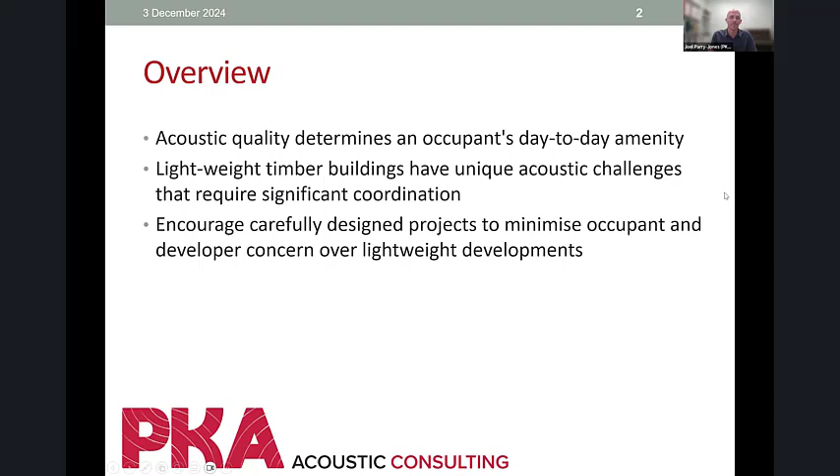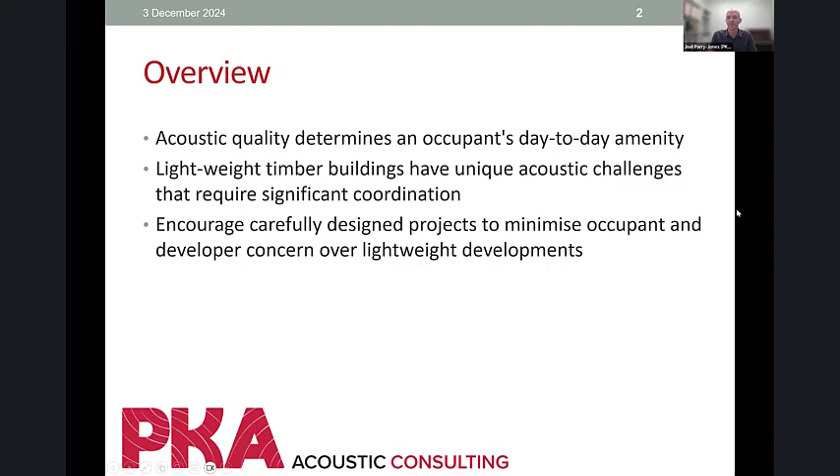And so I really am encouraging carefully designed projects, one that helps minimize occupants' noise complaints over the long term, and it also helps developers in terms of their concern over lightweight developments and whether people will be cautious in purchasing. So well-designed buildings is what I'm preferring.

Now, without a problem, there's no solution, and so there's a fairly easy problem in the Australian code, and it's just that some of the code is just not up to scratch in terms of what people are expecting from amenity.

So straight from the NCC, the building code, their goal is to have a nationally consistent, but it's minimum necessary standards for all health, safety, amenity.

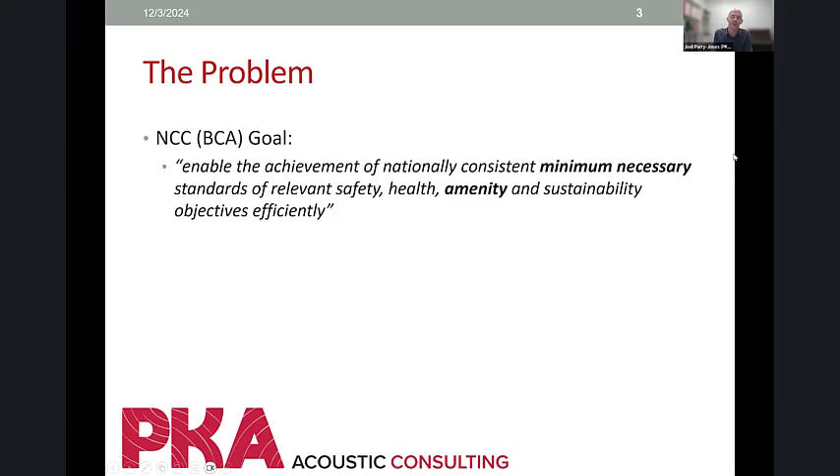And so this minimum standard, when we push back on the building codes board and say we think the criteria isn't good enough, they say, well, it's only minimum. It's only to meet the bare minimum, especially for low cost housing. And so that's a real problem when you're trying to design a lightweight building, but even just a quality apartment.

Now, the actual objective in the building code is actually quite stringent, because it's trying to prevent the illness and loss of amenity to the occupants. So it's designing buildings, floors, walls, all the treatments around to not lose amenity.

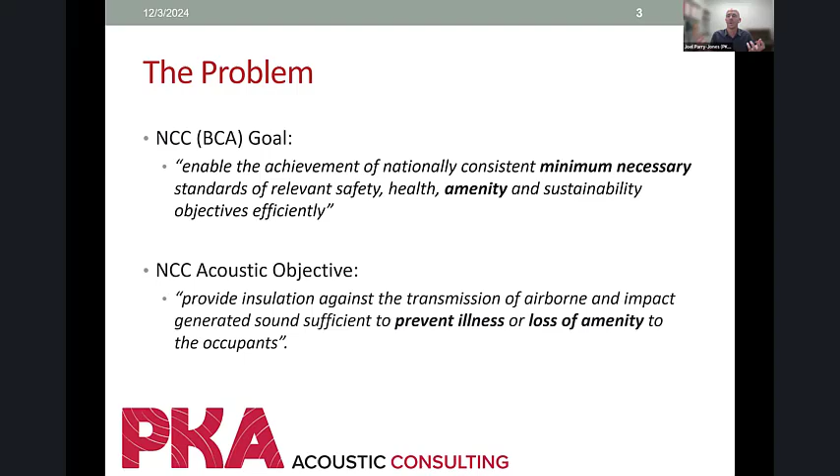And so the question is, well, what is the standard? So the basic standard that you're probably familiar with, which is now Part F7, previously Part F5, is you have an airborne component in terms of how much sound travels through the air. And that's these RW descriptors and CTR descriptors, which we can get into, but they're single numbers that are trying to capsulate how much sound is transferring between spaces.

And for airborne, it's an RW plus CTR greater than 50. And for impact, it's an LNW, and Aedan can get into some of that too, but the lower number is better for impact. And so those are the standard Part F7 requirements.

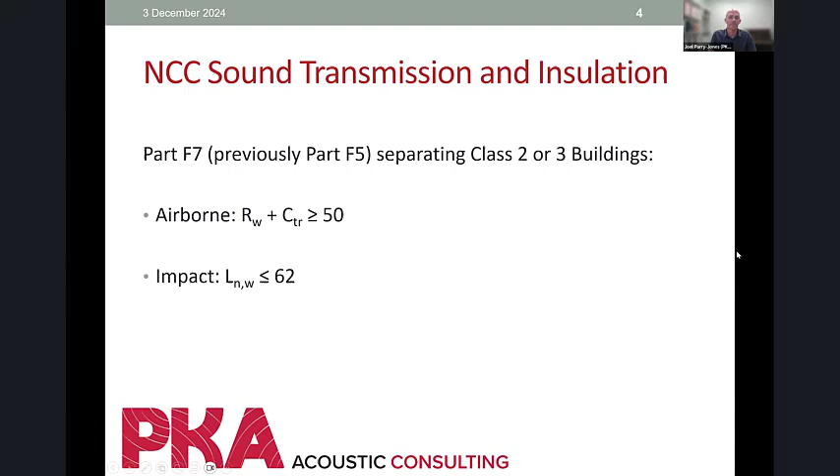Now, just generally, we won't get into too much specifics here in the intro, but in my opinion, a lot of the acoustic consultants around industry think the airborne criteria is very reasonable. It's sufficient. If you build to the airborne criteria, conversations, television, music, all that sort of noise within an apartment is fairly controlled. We rarely have noise complaints from that. If the building's been built to code, it's fairly suitable.

There's no other way to say it, but the impact criteria is woeful. So please don't design for minimum. Now, normally conventional buildings with concrete can get away with it because their standard designs are already sometimes better than minimum. So especially if you're doing a lightweight development, don't aim for the minimum.

Footsteps, moving furniture, any sort of hydraulic services, any sort of structure-borne noise readily causes complaints. We're constantly dealing with insurance claims, and when we assess them, we say, sorry, it's meeting code unless there's a specific development requirement that was anticipated or baked into the contract. There's really nothing that can be done.

So we're really offering and recommending you aim a lot higher or a lot better.

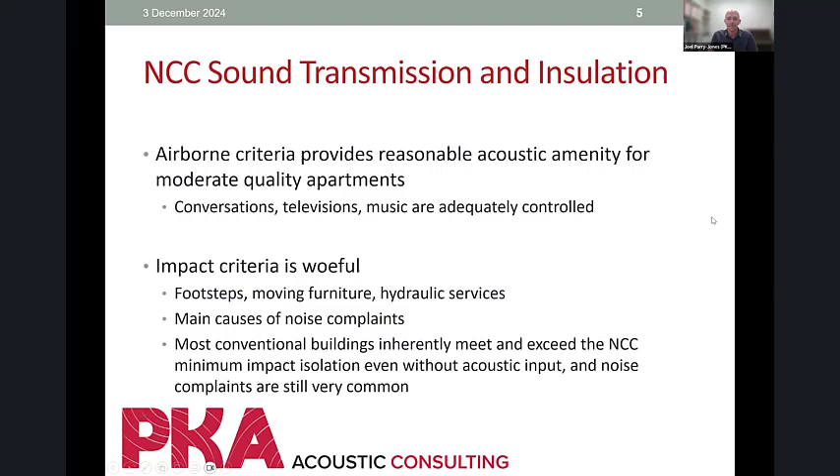There is an AAAC guideline on apartments that my firm and other firms have helped develop, and it rates them in star ratings, and we'll get into that in more detail. But it rates the impact criteria down at about a 2-star, and you could go all the way up to about a 6-star in terms of performance.

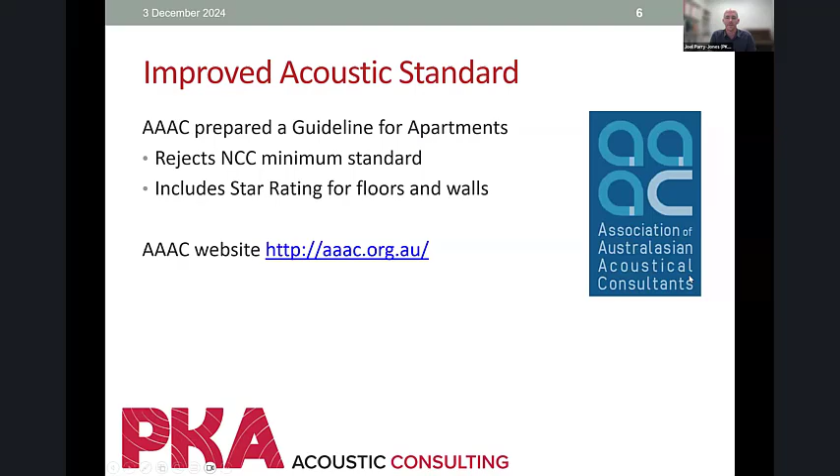So that's probably all from me from the intro. I reckon Aedan could probably step in here and talk a little bit about the North American market. Is that right, yeah, Aedan? Yeah, that sounds good. Thanks, Joel.

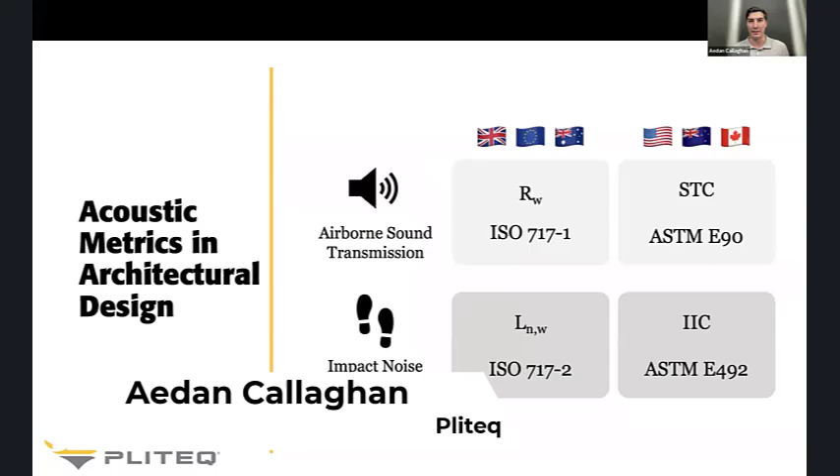So, like Joel was mentioning, there's some similarities and a few differences between Australian acoustic requirements and North America. One difference is that in North America, the up to 6-story building height is really dominated by lightweight timber construction. So I thought I'd start by comparing the similarities and differences, then pass it back to Joel, and we'll get into what's being done and what performance is achievable with some of these buildups.

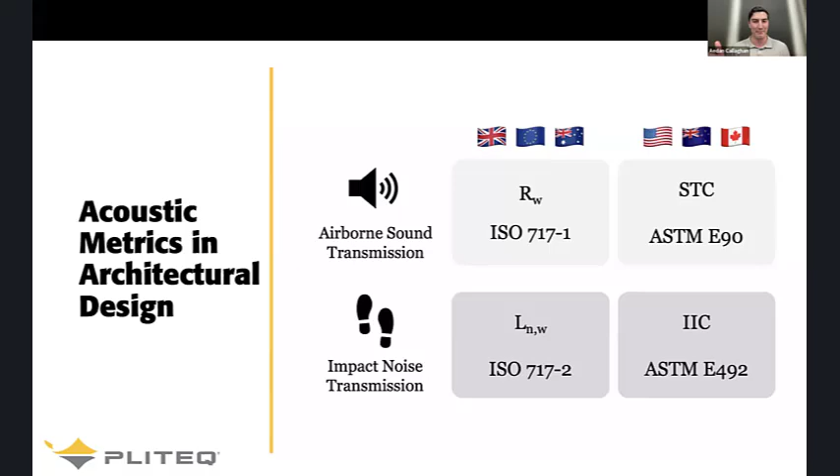So starting off, the UK, the EU, and Australia are all under the ISO standard for acoustics. The US, Canada, and New Zealand are all under the ASTM standard. So for airborne sound, RW and STC are the two crossover metrics. And for impact noise, LNW and IIC are those crossovers. Now, one of the similarities is that the vast majority of noise complaints in both jurisdictions fall under impact noise transmission. That really is the piece that lacks in building codes in many countries, not specific to one area.

So there are a few more nuanced differences. The frequency range that is examined varies slightly from the ISO standard to the ASTM standard. But one of the bigger ones is that the ASTM standard has something called the 8 dB rule, which basically limits that single number rating. I'll touch on an example that puts more context to that and how these single numbers are determined, and then Joel and I can probably both speak to some of the challenges in a single number rating.

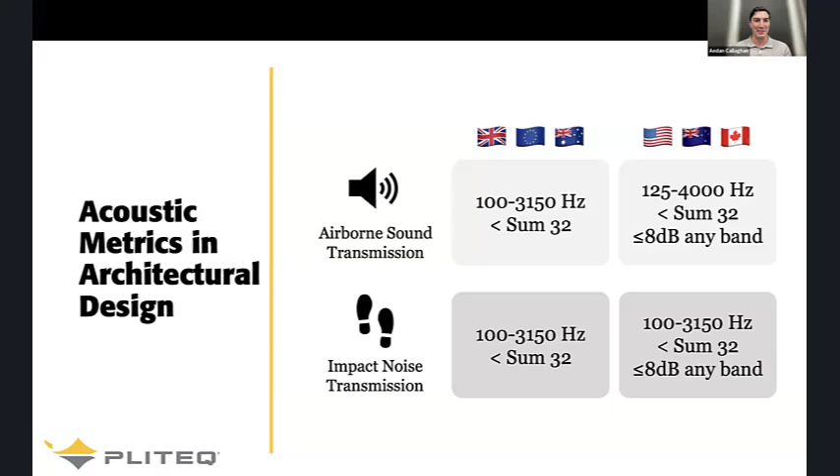So starting with the ISO standard: for RW, the higher the number, the better. LNW is actually the opposite, the lower the number, the better. ASTM has decided to make it so higher is always better. So basically, without getting into the nuance of that 8 dB rule, to get your IIC rating, you just take 110 minus your LNW.

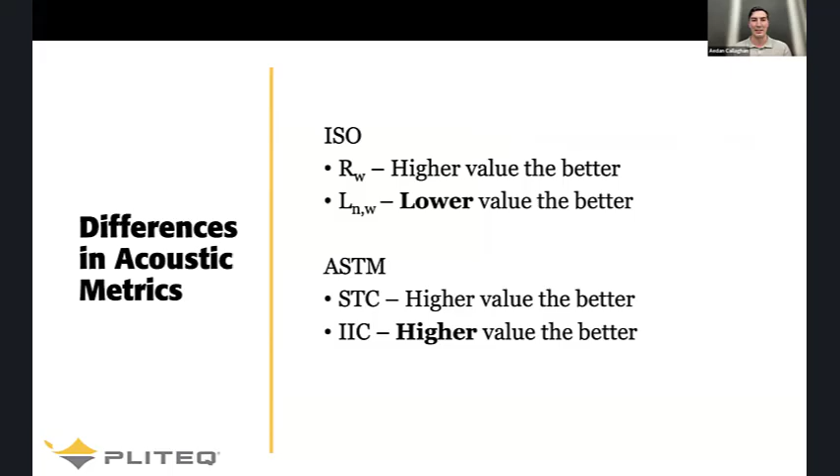But then there's this challenge of a single number rating not really telling the whole story. So in North America, they decided, since one single number rating is challenging, let's have 3 single number ratings instead. These 2 additional ones aren't code required, but they are starting to be looked at in the acoustics community, and I think there's some benefit—it's better than just having one single number where you might be missing information.

So it's been broken down into these additional HIIC, or high frequency impact insulation ratings. The reason is that if you change your underlayment on a concrete building, you can occasionally double the thickness of the underlayment and not change your single number rating, even though high heel clicks have gotten drastically quieter. The high frequency is what that underlayment is helping with, but you might not see it because it's getting drowned out in the single number rating.

Conversely, for wood frame, you might be meeting code, or even meeting a reasonable, well above code single number rating for impact performance, but the low frequencies—50, 63, and 80 hertz—aren't covered in either of those standards, whether it's LNW or IIC in North America. So this new rating looks at those low frequency data points and more heavily weights them.

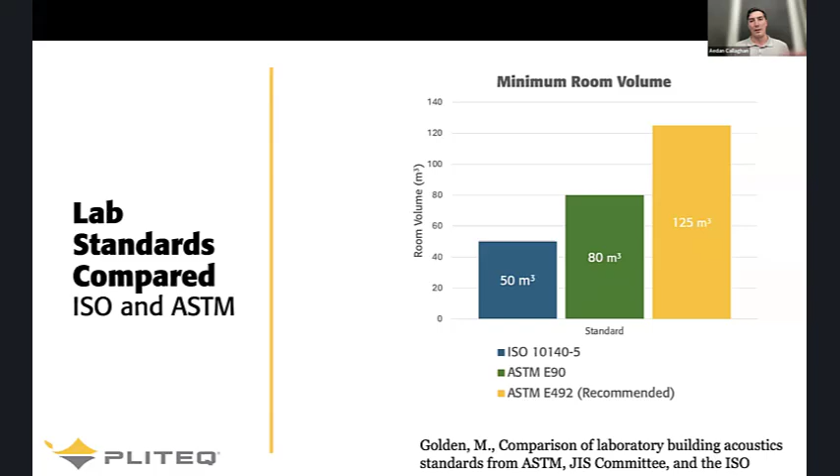What that means is that the point that you're getting to sort of a representative measurement, where you have enough sound waves bouncing back and forth in the room to get a real representative measurement, tends to be around 400 hertz for the ISO minimum room volume, and 160 for the ASTM minimum room volume. So it just means that below that, you can get larger variations in that result. So that is one of the challenges that the industry faces as we try to develop better low frequency performing systems.

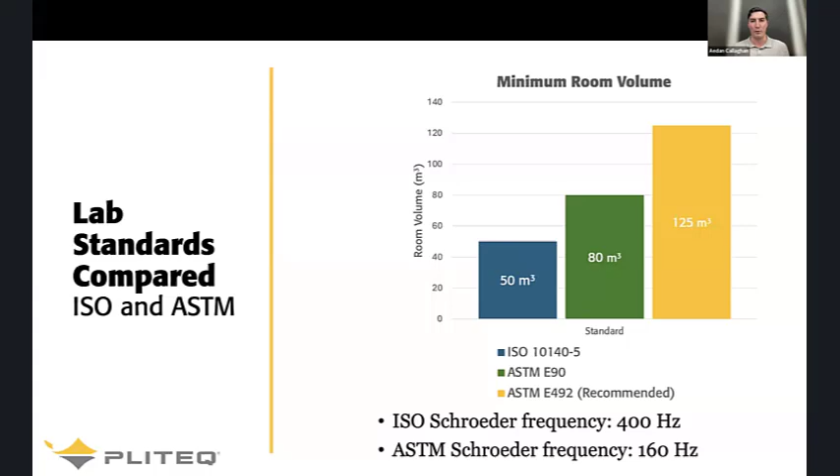Now to that 8 dB rule, this is actually one of the things that helps in North America prevent these really woeful low frequency performing assemblies. And the reason for this is that to get your single number rating, you actually, in both standards, sum up any deficiencies. So any point where your impact sound is above this reference contour is called a deficiency. Both standards have the sum of that having to be less than 32.

But in ASTM, there's this extra rule that at no single frequency can it be more than 8 decibels above that contour. So this black curve here is where it's limited that single number rating because we have 8 deficiencies. So it's saying it's really poor performing down at 100 hertz. In the ISO standard, you don't have that rule. So you'd actually be getting IIC 46 in the North American test methodology, which is about an LnW 64.

So you would not be meeting code there, let alone having any kind of good, I guess, comfortable assembly. But the single number rating would actually put it at a 54 because it's sort of under penalizing how poor that low frequency performance is. So I can pass it back over to Joel to get into a little bit on some systems, and then I'll go through a couple North American case studies.

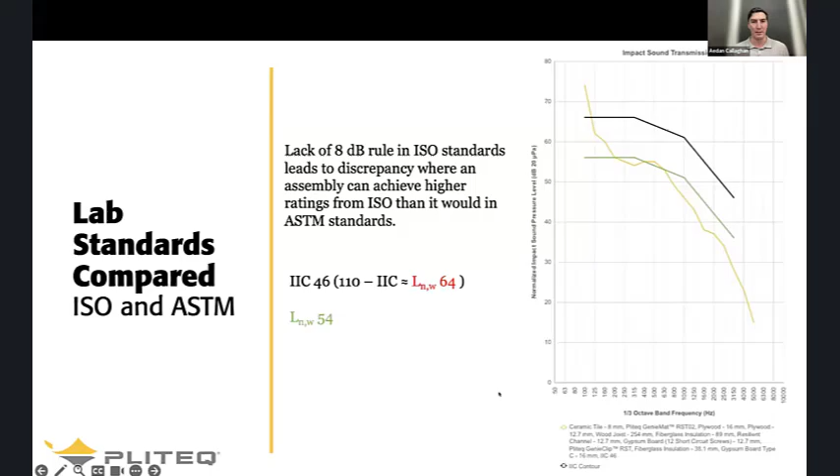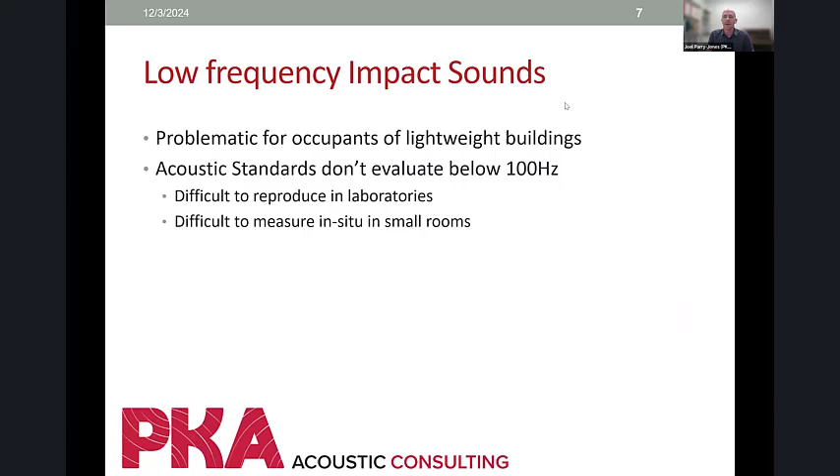Yeah, that's a great example, just showing 10 dB difference just by how it's actually rated. So I'm going to talk a little bit more about the single ratings, and Aedan's already sort of touched on that in terms of how problematic it is to actually measure it. So here's just a standard example where I thought, let's take a conventional system and then a lightweight system. Let's just have a look at how they perform across the frequency spectrum.

So you've got standard concrete slab. I'm not even putting anything on the surface, just bare concrete slab. And then with just a standard suspended ceiling, no resilience, no acoustic insulation. So that's sort of the minimum that we always see builders trying to push over the line with us. And then this is basically the deemed-to-satisfy code required timber joist system that's in the building code. So how do they compare?

So this graph, just as a little primer, similar to what Aedan's talking about, if you can see my mouse here, you've got your low frequencies down the bottom here. That's all your thuds from bare feet, from children running, things like that. Then you've got your mid-frequency footsteps, and then your high frequencies from high heels and hard shoes and things like that. So the blue line here is the overall concrete performance, and a lower number is better.

So it's showing that in the low frequencies here, it's sitting around 60 to 70 dB, and then it's sort of following this dotted line curve, which is sort of like the averaged level to replicate an LnW 62. And then you can see here that because it doesn't have any underlay in it and there's no resilience, the high frequencies are more prominent. So you'd hear high heels more. But when you compare it to your lightweight floor, it is getting the exact same LnW 62.

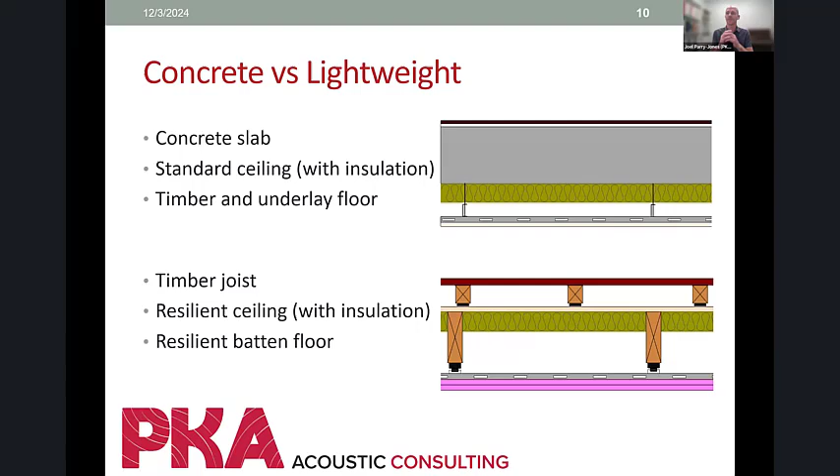So then the next system for comparing, just to show the deficiencies of that single number, is a fairly well isolated concrete system. It's now got some acoustic insulation in the cavity, and it's got a timber floor with some rubber underlay. So it's a pretty conventional concrete that you'd see in a moderate to high-end apartment. And then in this case here, I've got the standard timber joist ceiling, and I've put a resilient batten on top, to see what could be done to improve that. And I've sort of jury rigged the numbers to get the same LnW value just for comparison.

But you can see here that they're both achieving 45, which is almost 20 dB better than what the building code would recommend as the minimum. And you can see here that in the high frequencies, all those hard sole shoes and high heels, they're basically equivalent. But there's enough isolation in the system now that you're barely hearing those, if at all. And then there's a bit of change through the mid-range where, because of the amount of resilience in the timber system, it's performing better in this case. But there's still a significant, almost 10 dB difference in the low end.

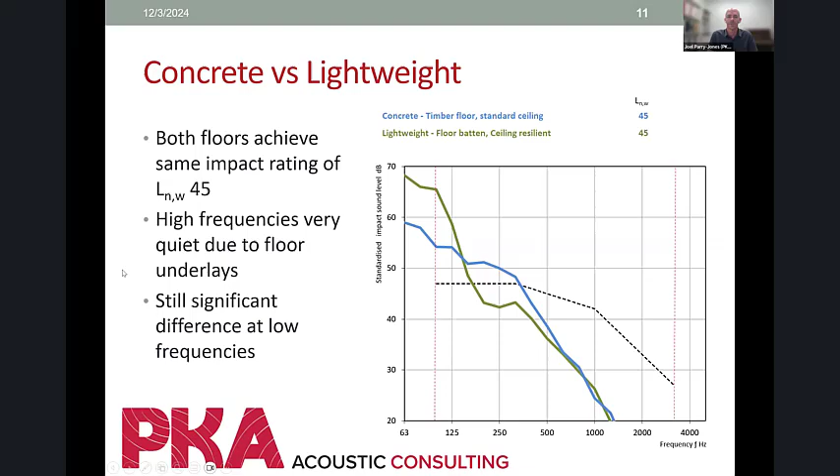So even though this is a good rating, if you were to get a 45 on site, you'd be very happy. There's still a big change in the perception of that sound, that it'd still be like, oh, it doesn't sound quiet, even though it's a good single number rating. So that's sort of just a word of caution. I might jump back to you, Aedan, before I get into some comparisons. Yeah, sure.

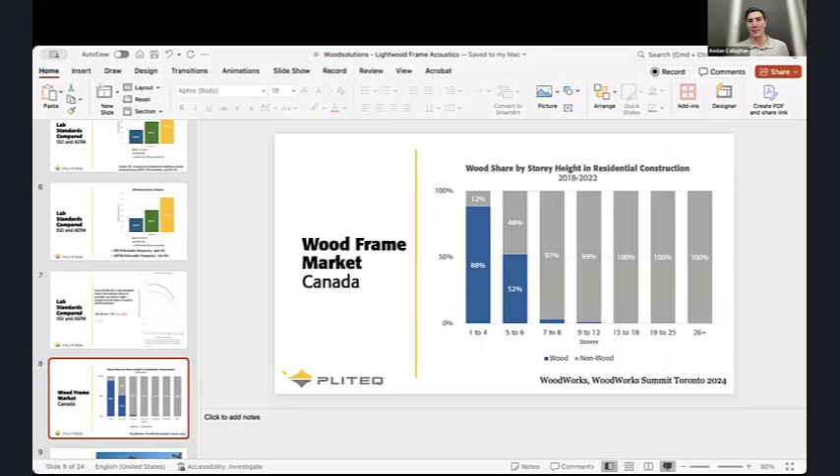So when we're talking about North America, I mentioned it's a pretty drastic amount that is being built in wood in that low to mid-rise here. And there's a couple of reasons for that, but the main drivers are it's a much more cost-effective way to build in a lot of cases at these heights, and the other reason is sustainability. So the government, both in Canada and the US, and I think it's the same in Australia, there's an affordability crisis and housing crisis. So we need more housing stock delivered, and trying to figure out ways to do that affordably and sustainably, because the carbon emissions of building the amount of housing needed if it was all out of concrete would be quite drastic, have led the charge there.

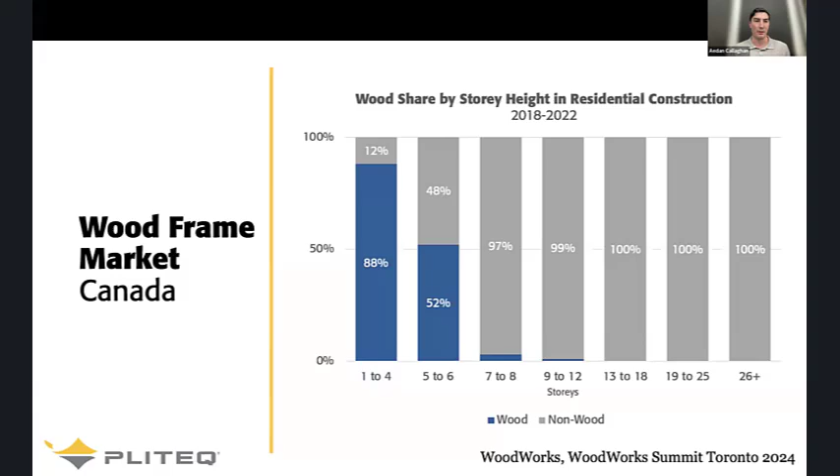But from 1 to 4 stories, this is specific to Canada from the Woodworks group over here, 88% of that construction is in wood. When you get to 5 to 6 stories, still 52%. So it's still the majority of projects at that height being built in wood. 7 to 8 and then 9 to 12 are where mass timber is starting to slowly take bits of that market share. Light wood frame in North America tends to be limited around that 5 to 6 story height per the building code for fire here.

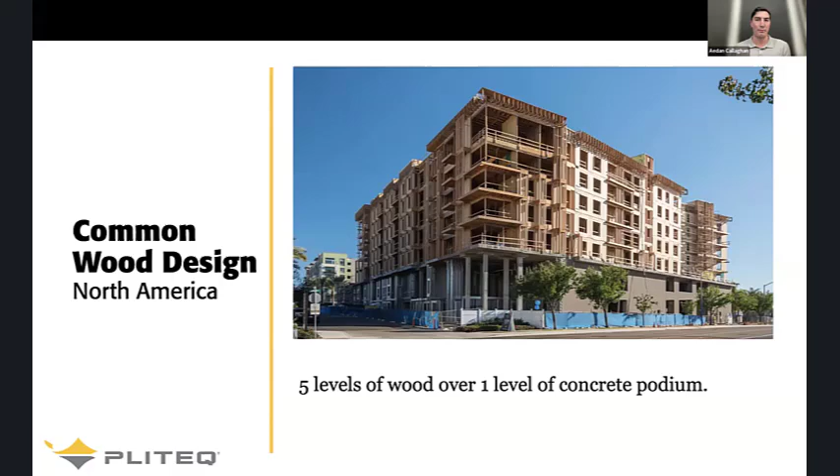So the most common project type in North America is what we call here a 5/1. And that is 5 stories of light wood frame built over one concrete podium level. And you can't typically drive for more than 10 or 15 minutes in a North American city without seeing, especially as you get to the suburb areas, this type of project. So I thought we would look a bit at what is being done on all of these projects and compare how the performance levels end up relative to concrete.

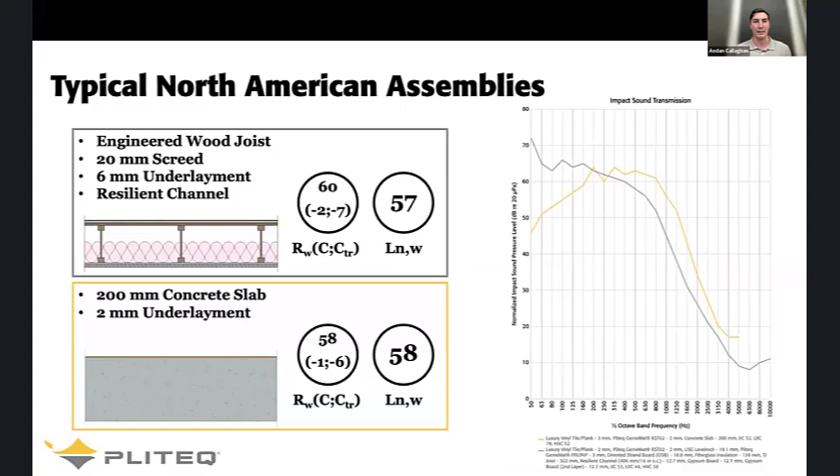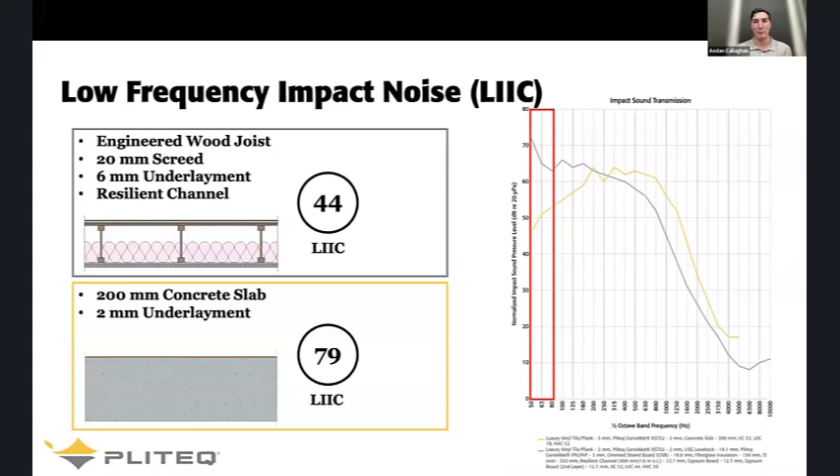And this is where those other single number ratings that North America have introduced come into play. So at least it gives you a sort of idea these two assemblies aren't the same. So that wood frame assembly, if you just looked at the low frequency impact noise, is 44 versus 79. So the concrete you can now see is very high performing relative to the light wood frame. The high frequency, the HIIC rating, would say that the wood joist assembly is a little better. It's 6 points better than the concrete, but that's not where the noise complaints are going to be coming from. So it gives a little more insight into that comparison.

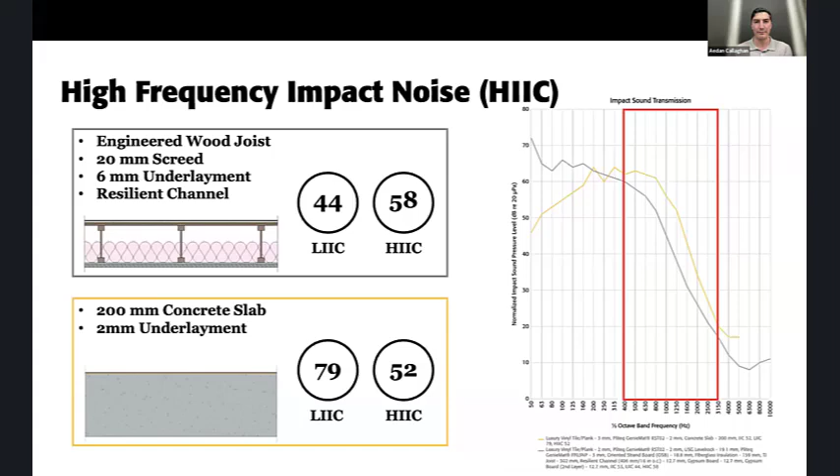The other thing that's been a big move in North America in the recent few years, and I think other places like Australia, the UK and parts of Europe have been much more advanced in this area, is not relying on screed. In North America, it's been very common to just pour screed toppings that often actually underperform relative to what the lab testing would say. But there's been a big shift away from that for a number of reasons: issues with cure time or cracking, reducing the structural weight, and then new initiatives and code requirements to actually reduce the embodied carbon of these structures and keeping this mined cementitious wet material out of these wood buildings have been kind of a big focus.

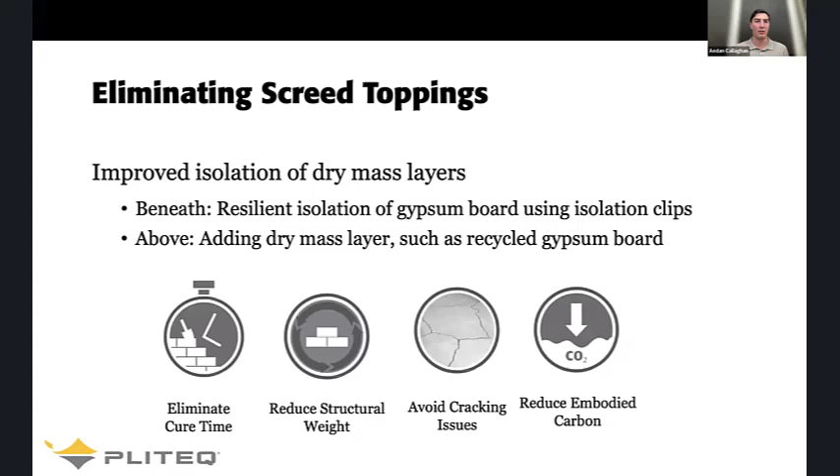Same goes for mass timber as well, but even in light wood frame, this has been kind of a big focus. So the way that this is sort of being achieved is taking the other mass layers that you might have in this dry system and isolating those to a greater extent. So whether that's better isolating the ceiling, the gypsum board on the ceiling, and if you're adding mass on your subfloor, having that in dry panelized systems.

We get a lot of calls: oh, well, can I just put a thicker rubber underlayment on top of my wood frame assembly because I am having noise issues? But at that frequency, a thicker rubber underlayment is going to be limited in how low that improvement can help. Whereas isolating that ceiling or a thicker resilient buildup on top is going to be what lets it get to that lower frequency improvement.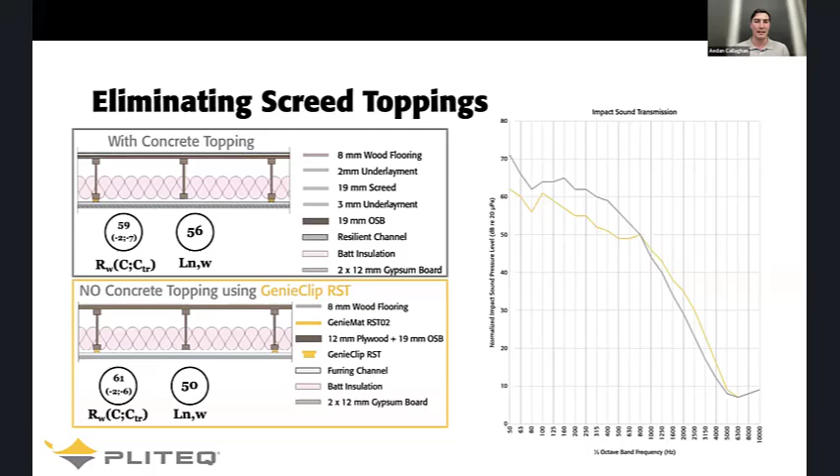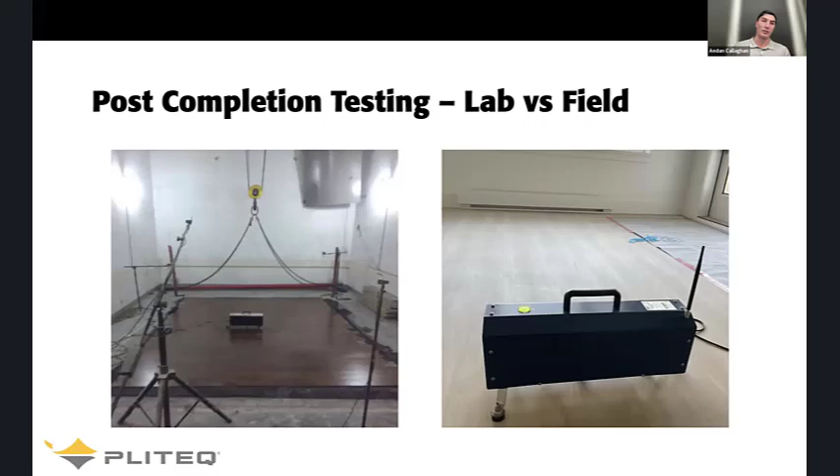So when we compare that improvement from isolation clips in the lab to this recent project, where post-completion testing was done actually in the building itself, you can see again ceiling isolation clips help down at that low frequency. The only difference here was the Genie clips on the ceiling compared to a res bar. Your single number rating, the DNTW, or over here the AIIC, is about a 6-point difference. So the single number is saying there's improvement, but the low frequency impact rating is actually saying 13 points.

Anything you want to jump in with now, Joel, or do you want me to continue? Leave that slide up, because I think that's a really good one. And I think especially with timber developments, it's looking at multiple points of isolation.

If the energy can get through that initial underlay into the actual joist, then similar to resting your ear on a table and tapping anywhere, the sound's just going to traverse straight through the joist, go right through all the structural elements. We've even experienced noise issues that occur over 2 floors because it just gets into the external facade and wraps all the way around.

So having multiple layers of isolation means you suddenly get the benefit of that entire air cavity in the system, because the sound travels down through the joist and then it's interrupted before it gets to another hard surface in a ceiling. So multiple layers of isolation could be above the joist, below the joist. It could be at party wall joins or at columns or beams. So it's starting to think about how do we keep the energy within the apartment itself, within each apartment.

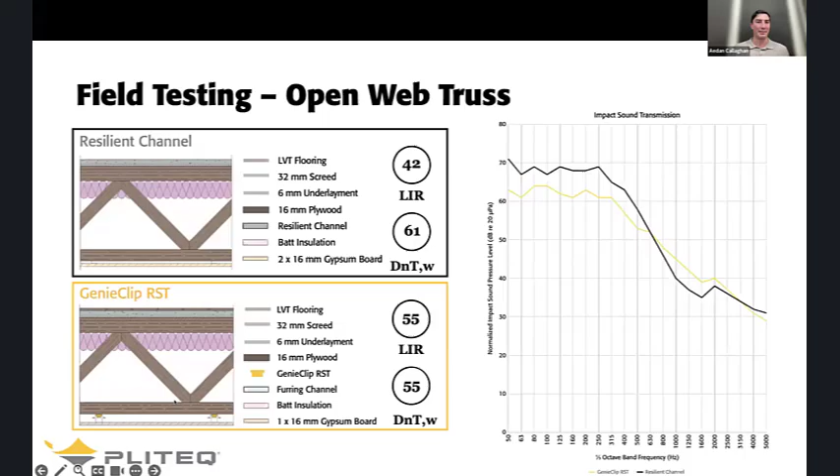Okay, so even though there's a lot of things to look at in terms of the graphs and the spectrums, which we're going to sort of hammer home with recommending acoustic consultants, in the end they're still going to end up talking single numbers. So single numbers are helpful to some degree.

So here's a rough guide we've put together in terms of LNTW, LNW, where a lower number is better. If we start up here, when we're around the 60s to 65s, it's just a very noisy environment. Footsteps and everything is clearly audible and clearly a problem. Then as you slowly etch through the 50s, things are still audible.

You can start to accept it, but we've had experience with people saying, 'Oh yeah, less than 50, I can deal with that, I'm used to living in apartments.' But it's really when you start to get below the 45 that the impact sounds are just audible and it's now comfortable. So this is a long way from code.

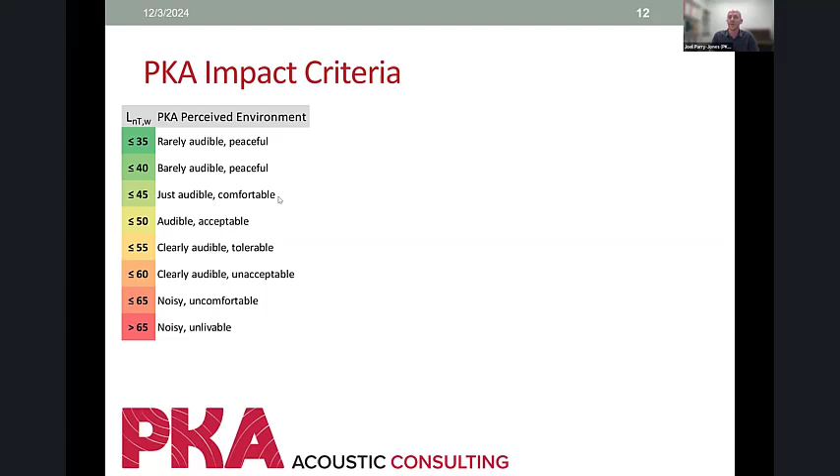So the next slide talks about where the building code sits. It's sitting right up in this noisy and unacceptable range. And then to the right here, I've got the star ratings. We've sort of set the star rating at 2 stars around here, and it's not till you get to a 4 to 5 star that we start to recommend. This is where you should be aiming to start for apartments, and then as you move into more high quality luxury apartments...

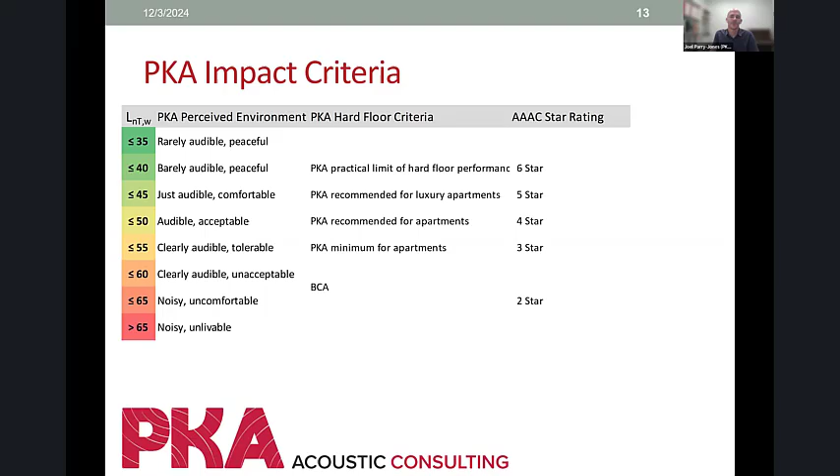We sort of get to about the 45 to 40, and you just get to a practical limit beyond which it's incredibly difficult to get anywhere beyond that until you go into a carpeted type flooring.

So just as an idea of how far you can push a system, we'll look at conventional first, just as a baseline. If you've just got a 200 mil slab with nothing above and nothing below, that's sitting around this sort of range here. And if you put a slight foam underlay on it with a hard floor, that's basically code compliant. So that's how poor you have to work to even get it there.

And you've got to start to add rubber, and you've got to start to add screed or any sort of dry mass layers. So you're getting into a point where if you haven't got a ceiling in a conventional concrete system, you're really limiting at this sort of acceptable range where you've got a heavy layer with some thick underlay.

Comparison, obviously, as soon as you've got a ceiling, which is a lot more common these days with services, then you're already starting 10 dB ahead of the curve. So you're already code compliant with nothing above. And then as you start to add on the layers above, you're starting to get into a really, really comfortable, peaceful environment.

So now if we keep this system on the right and add in a lightweight joist system, this is still the single number comparison, not like what we were talking about before, but it's starting a little bit worse. And this has already got resilience and insulation in it. So when you start to add some underlays, you're getting into the tolerable stage with some heavy screed or a dry mass layer. We're finding that trying to get up into this range is quite difficult and needs a lot of coordination, extra mass, and clever design. So that's for you architects on the line to be thinking about.

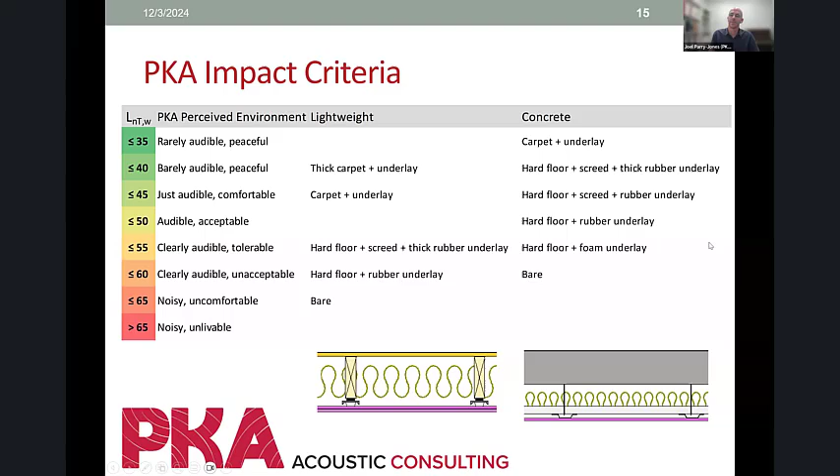And when we've tried to push systems into this sort of range as a hard floor, that's where the cost increases, and then we start to get clients pushing back and saying, well, hang on, this is no more cheaper than conventional. Why are we going down this path? So we really try to say, believe in the timber and come up with solutions. That's really what we're aiming for here, and come up with some creative solutions. And Aedan's got some more slides on just the cost later in the piece.

Did you want to jump in here before I go into something more about how you look for consultants, Aedan? Or yeah, sure. I'll go through the case study, and then we can go over to that.

So yeah, this is just one recent example in North America. This was a sort of master planned development, not too far from where I live on the west coast of Canada. It's a 5-building development, ranging from 4 to 6 stories. All of them are wood timber frame.

But it was delivering 590 rental units, and 60 of those are designated as affordable rental units. One of the other pieces to this is that it's in a high seismic area, so controlling the weight of the structure was really a critical piece as well.

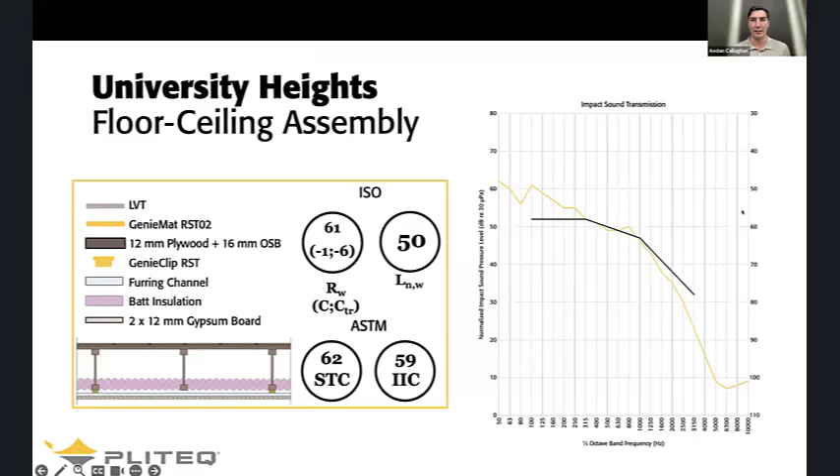So this is the assembly that was selected. The single number ratings: it was an LNW 50, and RW plus CTR would have been 55. You can see that its limitation is still low frequency, but sometimes it can be tough looking at the curves relatively, so I'll put it compared to a 200 millimeter concrete in a couple slides. This is where the weight savings were really important. Looking at the screed topping options, those were adding quite a bit of mass, between 31 to 63 kilograms per square meter, which the structural engineers were really challenged with.

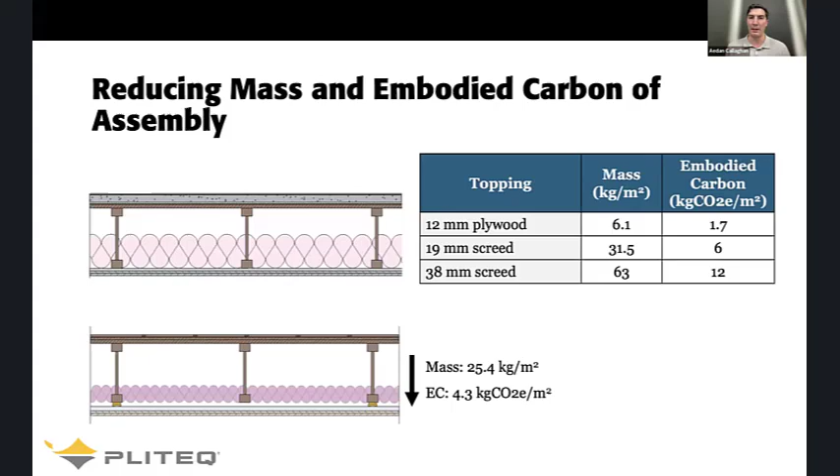So instead, they added additional plywood layers, which also has a carbon reduction benefit. The embodied carbon of wood, even if you don't take into account the biogenic carbon—which in North America you're not allowed to count for carbon sequestration—is I think even more enlightening when you look at it under the European EN calculations. But even there it's still showing that we're reducing the carbon footprint of the building quite substantially; that specific comparison is almost an order of magnitude reduction.

So then this is another assembly, more popular in some of the European buildings we work on. It uses a recycled gypsum fiber board on top of the system. It's a wood joist with a reinforced metal webbing. You can see here, using the dry-laid gypsum board on a resilient dimpled interlayer to prevent vibration and impact from getting into the structure to begin with, and also having isolation clips on the ceiling to reduce sound transmission into that structural layer as well.

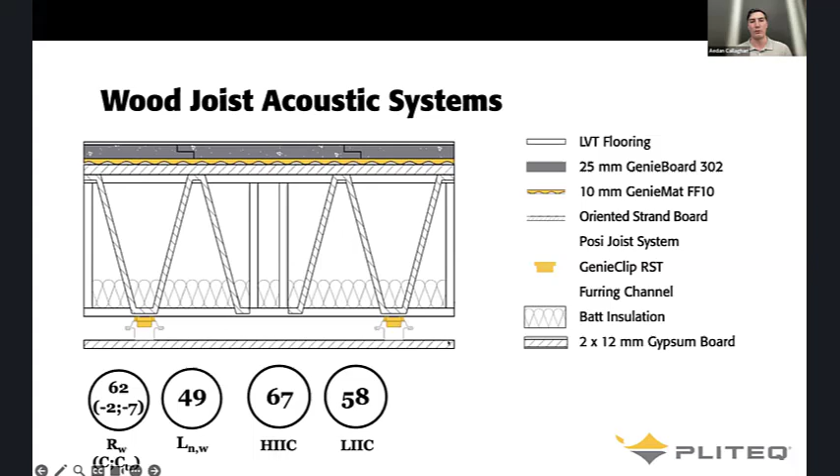So I thought I would take those two systems and compare them to a 200 millimeter concrete. You can see—this is just a standard, I think 2 millimeter rubber underlayment under a vinyl plank floor.

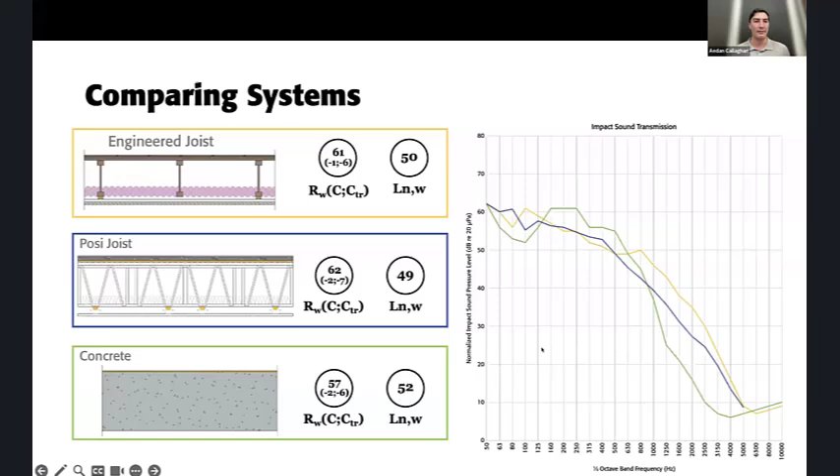You can see that concrete is still tough to match at low frequency, but these methods are getting it much closer by decoupling those different layers, keeping it closer to that occupant expectation of concrete. Concrete is a little worse in those mid frequencies, very similar to the data Joel pointed out earlier.

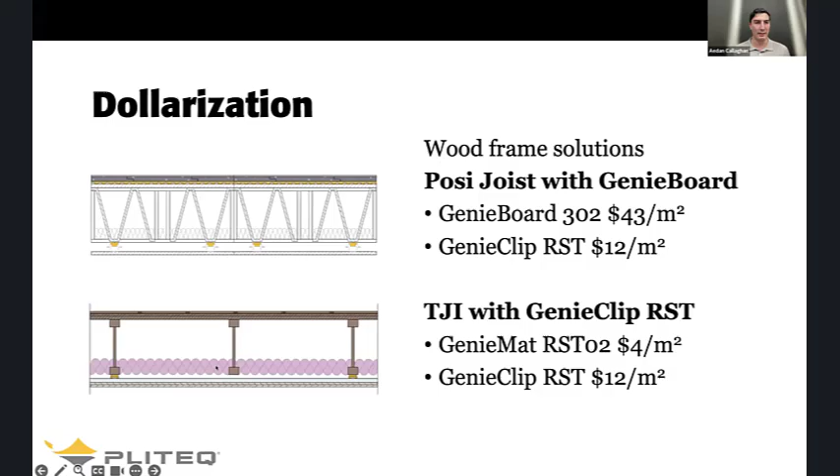And what do those cost? That becomes a very common question: okay, we can do some things to improve it, but what's the cost going to be, and does that push it back towards something else? The costs we tend to see for these products on local Australian projects, in Australian dollars: $43 per square meter for 25 millimeter recycled gypsum fiberboard, about $12 per square meter for using isolation clips rather than a resilient channel, and about $4 per square meter for 2 millimeter rubber underlayment rather than foam. So I can pass it back to you, Joel, a bit on the consultants.

Just probably the last bit before we go to questions: when you're selecting acoustic consultants, please ask for experience with previous timber buildings, but ask for their specific experience. Sometimes you'll get a nice pretty brochure with all the work they've done, but it might be their London office, not their local office. We find they'll commit and say, yeah, we've done all these projects, but then the consultants who actually worked on those are busy, tied up.

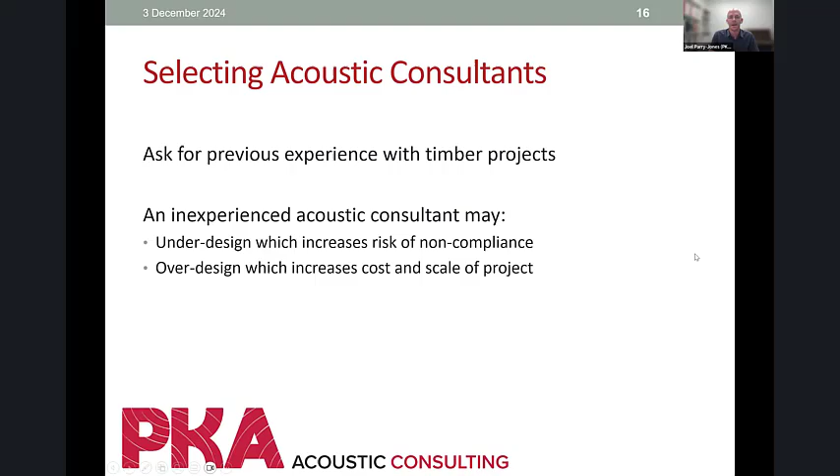So similarly, inexperienced consultants can under-design or over-design, which can change the risk profile and also the cost profile. There's a list, the AAAC, that lists member firms, which are all bound by the code of ethics and practicing their expertise.

Some of the things you're looking for, I'll flick through these quickly: trying to get the acoustic consultant in very early, especially when considering set outs and layouts in terms of spatial allowances. We've come in late on a few projects, needed extra floor-to-ceiling heights, and had to go back to council for extended building heights and things.

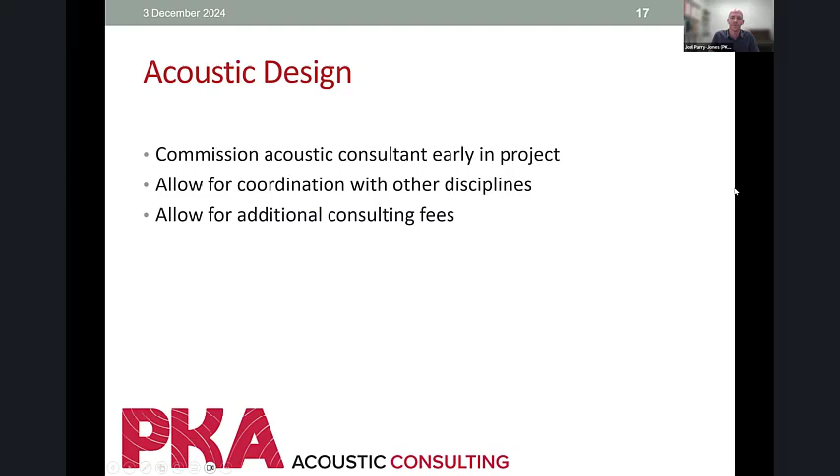So getting consultants in early, especially in lightweight construction, is really helpful, and getting them to coordinate with each other. Don't silo your consultants and just get them to write their own reports. Get them around a meeting table, or at least plan for some more design, which increases the fee.

It does cost more in the consulting stage with these lightweight buildings, but it results in a better building overall. One of the big things, whether you're a client or advising one, is really trying to work out at the outset what quality you're trying to meet. There's a bunch of different options here, obviously the minimum standard, which is something I'd recommend avoiding.

Sometimes that's just a necessary market you need to meet. There's also the improved AAAC star ratings. Sometimes a client will just say whatever the conventional concrete equivalent is, we want to match that. So that's where you need to allow for more design and all that.

Other times there are some very sneaky clauses in councils that require a certain star rating for a floor or a wall, and sometimes people haven't noticed until the DA's already submitted and approved. Then you get into design and realize, oh, this needs to be a 5-star building, we weren't aware of this. And that's separate to Green Star. Sometimes councils, because the building code is so poor, have thrown a star rating into the back of their DCP. So make sure you're aware of that, or that your consultants are aware of it.

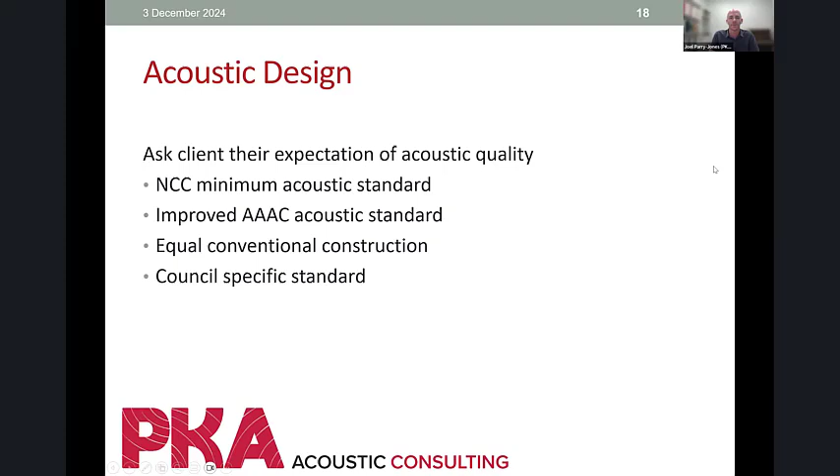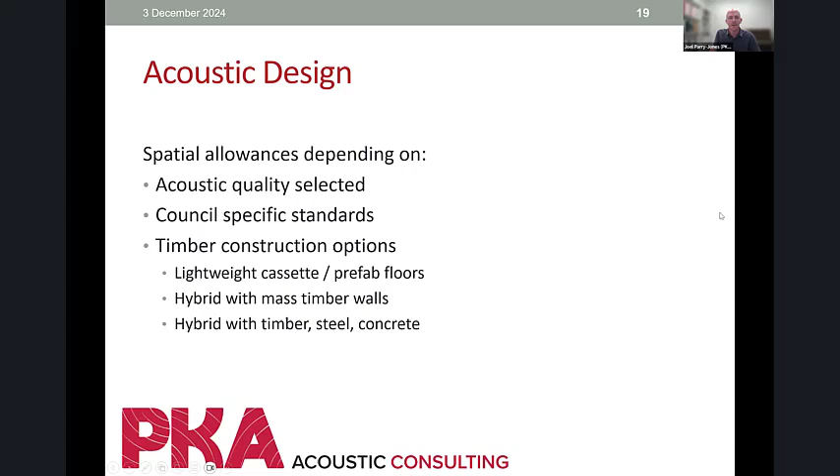And all of those things in terms of actual quality play out in terms of spatial allowances. It could be wall, floor, or ceiling footprints, and it can change depending on the type of timber construction, whether it's cassette or hybrid, sometimes with mass timber, steel, and concrete interwoven. You might have timber joists but concrete columns. There's all these mixtures you need to consider, and that plays out on your spatial allowances for footprints. That's probably all, unless Aedan wants to chime in. We can go to questions, or you can jump back in.

I've got a question here that might lead us nicely into our discussion on flanking. From James: low frequencies seem hard to reduce transmission. Are they less of a concern than high frequencies? What frequencies are most common that cause a nuisance - low, medium, high? It sounds like high is covered by the code and low is not, and that's the real issue here. Is that the headline?

Well, I think - and Aedan can step in too - the high frequencies sort of take care of themselves once you get some resilience in the system, which is expected. We're going to have to put some sort of underlay in, some sort of suspended ceiling, and so it's very rare that I find we're failing buildings, or that they're not fit for purpose because of a high frequency problem. Usually that's where they've actually bridged some resilience, or installed the hard floor right to the periphery and connected it straight to the external walls or skirting. So as long as the isolation's in the system, the high frequencies take care of themselves. Low frequencies are where you need a lot of mass and a lot of careful design.